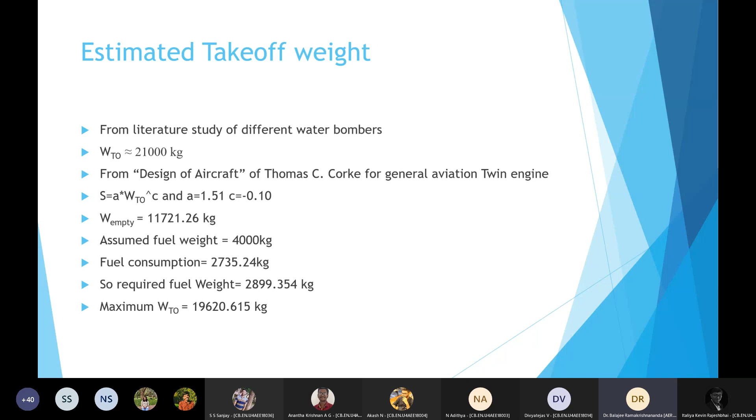So, based on what we did, we got our maximum takeoff weight as 19,620 kg. Okay. Now you just go back and do this again. See how many iterations it took to converge. That also you should mention. Then, whenever you show any presentation, you should give the specifications which I gave. All presentations should contain that on the first slide. After that, your own specification, then whatever you want to say. For every presentation, you should do that.

Is Sandita here? Sandita? Okay, she's not there. Give your presentation to Sandita so that she'll upload it in Teams for everyone to follow. Is that all? Yes, sir. Okay, good. After making the changes, we will pass it on. No, you can pass it on as it is. After making the changes, you make the report. People should know what you have done. That is good enough. Later the reports also will be uploaded, and people can study the report to find out the changes. Okay, sir. Thank you.

Good morning, sir. Good morning, everyone. We are Group 6, and we will be presenting to you the weight estimation process that we underwent for our amphibious aircraft. Our mission was to design an amphibian tourist aircraft that can land on water, land, and snow or ice, specifically for tourist travel to and from hilly and mountainous destinations, and to land on lakes and snowy areas.

Since this is a tourist aircraft and the objective is to maximize profit, it should have a passenger capacity of at least 30. So we have taken this to mean at least 30 passengers plus 4 crew. So the routes we will be taking are based on the specifications given to us. Why did you say 4 crew? Any rationale? No, sir. Similar scale aircraft had around that number, so we just assumed.

Because from the FAR specification, up to 19 passengers you can have no crew, and beyond that you need 1 crew, meaning a flight attendant. Maybe pilot and co-pilot, 2 people. Sir, yes, we included pilot and co-pilot as crew. So according to this, you need only 1 or 2 crew. Okay, sir. Maybe a tour guide. Tour guide. Okay, 4 is good enough. The tour guide, if he is capable, can also be a steward or flight attendant.

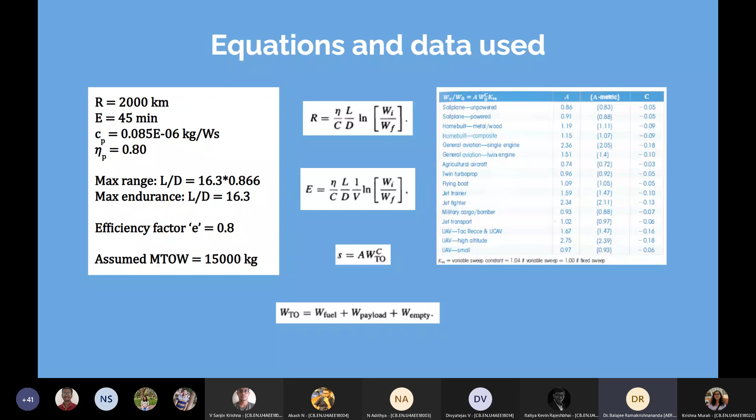WE by W naught is equal to A W naught power C. So this is only for the first iteration. Yes, sir. When you go to other iterations, this fraction will change from 0.65. Yes, sir. Actually we wrote a code for this, so at the end of the code it printed this value. I can show you the code, sir, it's there in the next slide. No, code is not necessary. I want to know the algorithm you used.

So empty weight fraction WE by W naught you should calculate by subtracting the fuel weight and removing payload. Yes, sir. That is one value. The next fraction is from the empirical formula. And every iteration, this fraction will vary with takeoff weight. Yes, sir, that is varying. It's inside the iteration loop, so it did vary. I might have made a mistake while making the slide, but this is the final value of it.

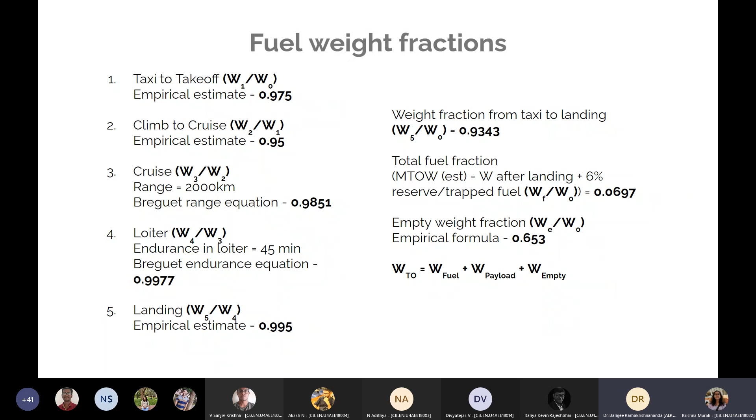Okay, continue. I'm being very elaborate in the first few presentations and first few exercises, because if you make a mistake there, then you have to come back all the way to correct and redo everything later. That's why I'm being very, very careful.

So the iteration we did using a simple while loop, and we subtracted our total weight, which is the sum of all the individual weights, fuel plus payload plus empty weight. Where do you do that? It's in the code, sir, it's there separately. Should I show the full code? No. While MTOW minus W. I don't want the full code. I'll check it when you submit the report. In the report you write the code.

So we did these 4 steps again before iterating. There was an initial estimate for WE by W naught and W total, and while iterating, both of these changed. Once this condition is satisfied, iterating is done; I want the method you used. That's all. So what we initially did was we subtracted. Next one. Just check whether it is following what I told. I won't check right now. Check when you submit the report. I assume that it's correct now.

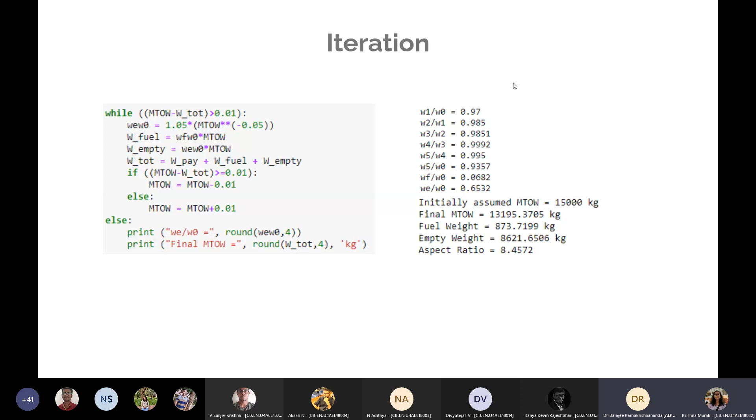Okay, sir. Thank you, Krishna. Thank you, sir. Yeah, next group. Who's next? Group 9, regional short haul. Yes, sir.

I'm sharing the screen. When you go to the next one, some things will be obvious, so I may ask you to skip over some things because they may be covered by the initial groups. They always have the responsibility of explaining to a large extent. Other presentations can be quite short. You continue. What's your type of aircraft?

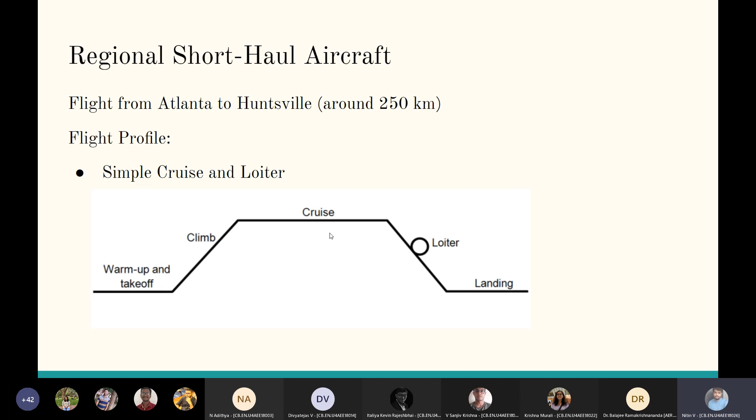A regional short haul aircraft. Regional short haul, okay. And the specification you gave us was from Atlanta to Huntsville, which is around 250 kilometers. Good, continue. So our flight profile is a simple warm-up, takeoff, climb, cruise, loiter, and landing. Next, this is the formulation we use.

Yes. Good. Next. And then you asked for payload 50 passengers, sir, so we've included that. 4 cabin crew and 2... which means how many pilots, how many attendants? Yes, sir. 4 cabin crew and 2 pilots. Sir. Do you need 4? Sir, because you mentioned 50 passenger aircraft, but most short haul aircraft have a minimum of around 90 to 100. For a 100 passenger aircraft, there are 4 cabin crew, sir. So we've included the same.

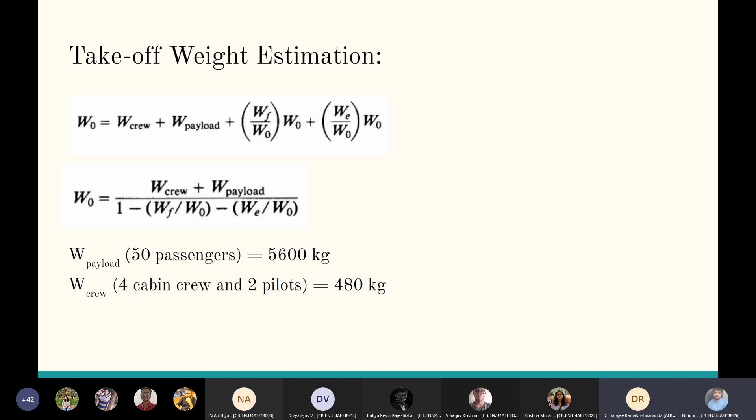For 50, you don't need 4. 2 should be good enough. Okay, sir. We'll change that. Change that and redo. Next, sir. We've used this data for empty weight estimation. So which one did you check? Jet transport. For short haul, where do you use jet?

Sir, even turbofans come under the jet transport category. I've checked some other data also; most of it comes under jet. See, it's a very short range. A turbofan will be very non-economical from a fuel point of view. You can use piston props or turboprops. What is the flight speed, Mach number? Sir, 0.82 Mach. You asked us for the turbofan configuration.

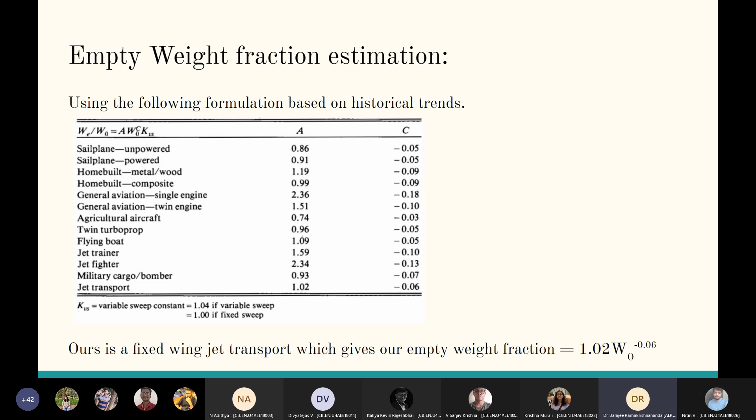Why is 0.82 coming? Because it is 250 kilometers, and how much time should you cover? Sir, it will come around 45 minutes to an hour. That's what I told her. Yes, sir. Okay. So the specification is bad, but let it be bad. Okay, don't worry.

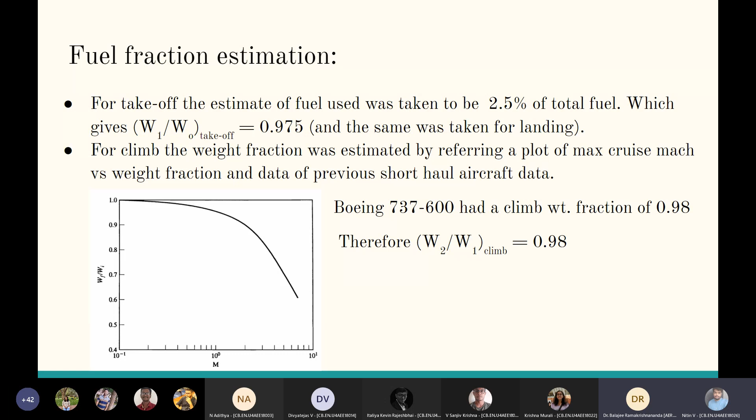We took the general estimate for takeoff and landing, which is 2.5% of fuel use, so 0.975. And then for climb, we used previous. Got it. For cruise and loiter, we've taken these expressions, and the required range is 250 and required endurance. For most aircraft, maximum required endurance is around 3 hours. No, not for this aircraft. I'll change that, sir. How much for this aircraft? Because the flight time is less than an hour, 5 to 10 minutes is okay. Okay, sir.

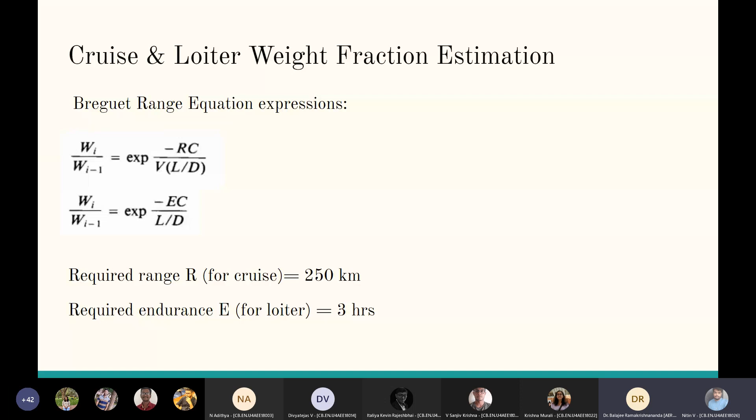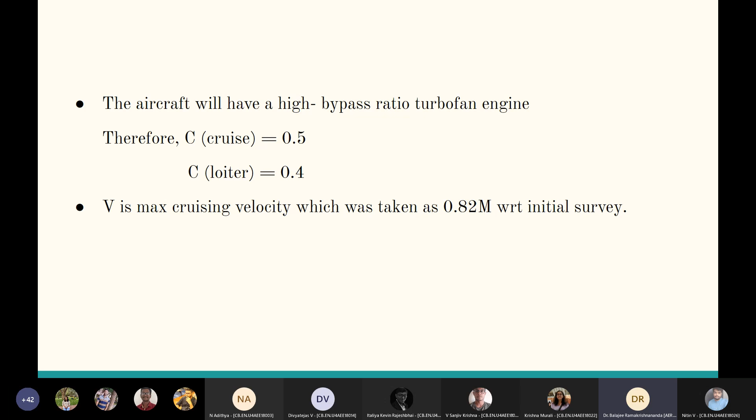Then we have chosen a high bypass ratio turbofan, so we have the C value as 0.5 and 0.4 for cruise and loiter. Why is C different for cruise and loiter? Sir, because our throttle setting will change. Okay, you don't have to go into that much detail. You can take it as 0.5 or 0.4. Only a single value will do. Okay, sir. And then we moved on to L/D estimation.

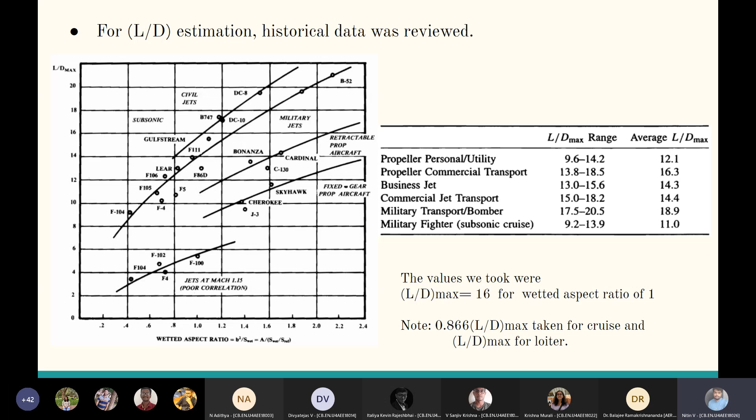We referred to these two data, and we took it as 16 for wetted aspect ratio of 1. Then we found the weight fractions to be so and so. Tell me the final one. For cruise, it is 0.9897. For loiter, it is 0.9277. Final fuel? Fuel weight fraction with refueling at destination is 0.1532, which is what we've taken. Just for reference, with refueling it is 0.15, and without refueling it is 0.2843.

So I'll tell you something. Change it. I don't mind if it's lower. Just remove that 0.82 thing. It doesn't work for such a short distance. You don't need a turbofan. So go to turboprop and redo the thing. I'm not putting a limit on your flight speed now. And range is 250 kilometers. Just change it. Probably you can inform Sandita also later. Change the specification. Okay, sir.

Then we did the iteration. We got a W naught expression, took an initial estimate of 30,000, and then did the iteration, and got the final value as 0.560 empty weight fraction. I'm more interested in the fuel weight fraction, finally what you get. You told it is 0.15 and 0.28. For every presentation, I'll be more interested in that fraction. When you converge, what is that fraction? That will be more interesting.

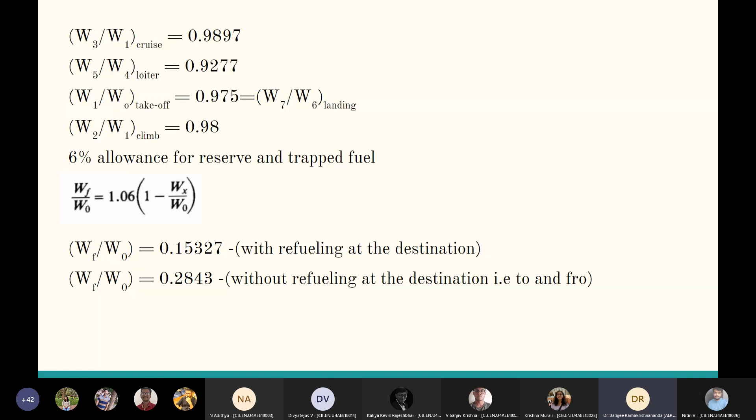Okay, so this is a bit high. Then you can't make a profit. That is why I am changing the specification. Use turboprop, or piston prop is also okay. I'm not putting a limit on the time. For just 250 kilometers, let it take a couple of hours, so what. No problem. You assume the flight speed. Okay, sir.

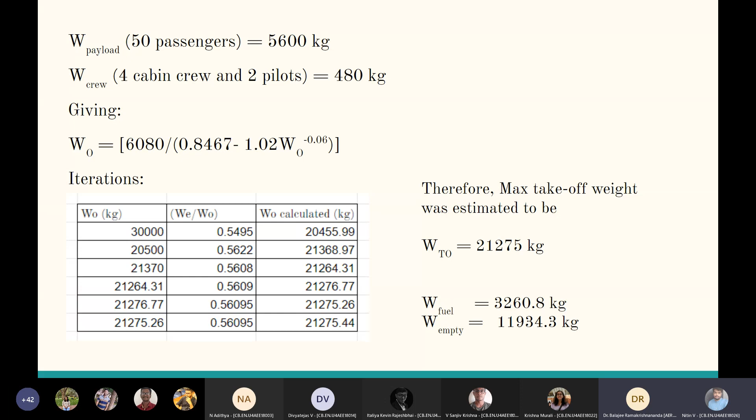Piston prop or a maximum turboprop. Don't go beyond turboprop, yeah? Okay, sir. That's all, sir. Thank you.

Because if you use it only for short haul, then you don't need a jet. Usually people repurpose other jets when they are not in use. No, they use it for this. Then it's okay, you spend a little bit more fuel. You get it from the passengers in some other way. That is fine, they don't mind wasting it.

But if your objective is only this, making profit only from this, then don't go for a jet. You won't make profit. Your pricing will be very high compared to your competitors, you lose out. That is why, from a business point of view, not technical, I'm talking from an operational point of view and making profit. Okay, sir, thank you. Thanks, Nitin. Good, short and sweet, good.